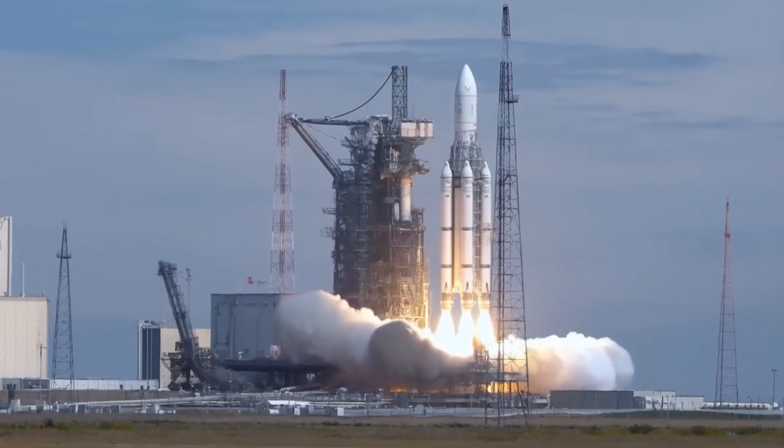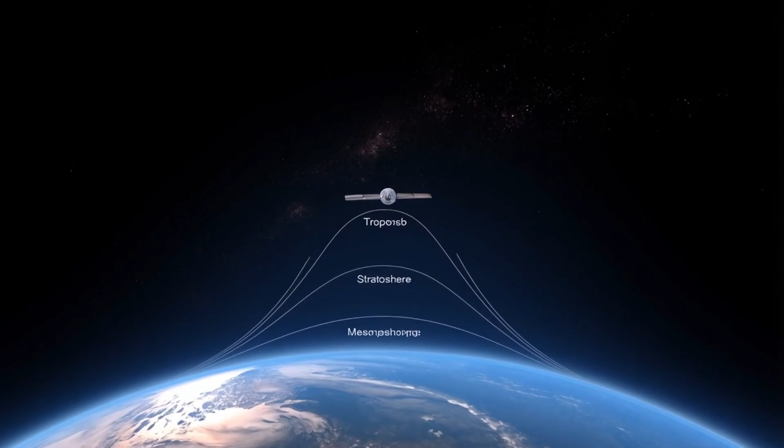But here's where it gets interesting. Notice the definition says, in the atmosphere. Once a vehicle leaves the atmosphere and operates in space, it's technically a spacecraft, not an aircraft, though many spacecraft function as aircraft during launch and landing, like the Space Shuttle did. The Space Shuttle was both an aircraft in the atmosphere and a spacecraft in orbit.

All aircraft fall into two fundamental categories based on how they stay in the air. Category 1. Lighter-than-air aircraft, also called aerostats. These aircraft float because they're literally lighter than the air around them. They use buoyancy, the same principle that makes a beach ball float in water. Hot air balloons work by heating air inside a large envelope. Hot air is less dense than cold air, so the balloon rises. Airships and blimps use gases like helium or hydrogen, which are naturally lighter than air.

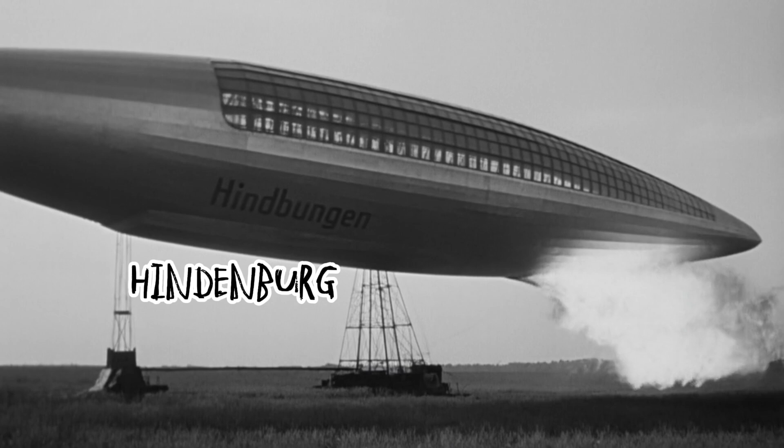And here's something most people don't know. Lighter-than-air craft were actually the first successful aircraft. The Montgolfier brothers flew a hot air balloon in 1783. That's 120 years before the Wright brothers. The famous Hindenburg was a massive lighter-than-air airship. Its tragic 1937 disaster essentially ended the era of passenger airships. Today, lighter-than-air aircraft are mostly used for advertising, aerial observation, and some scientific research.

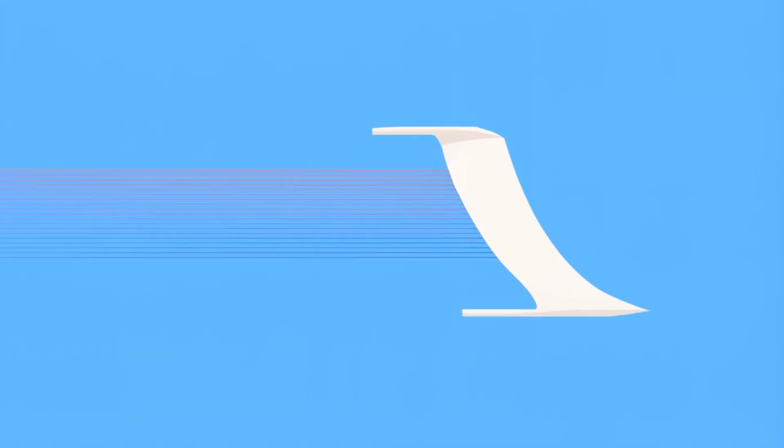Category 2. Heavier-than-air aircraft, also called aerodynes. These aircraft weigh more than the air they displace. A Boeing 747 can weigh over 400 tons. There's no way that's floating. So how do they stay up? They generate lift by moving through the air. That movement creates aerodynamic forces that overcome their weight. Think about birds. They're heavier than air. They stay up by moving their wings through the air, generating lift.

Heavier-than-air aircraft split into two subcategories. Powered aircraft have engines: airplanes, helicopters, jets. Unpowered aircraft, no engines: gliders, hang gliders. But here's the key. Even unpowered aircraft need some movement through the air to generate lift. Gliders use gravity and air currents. They're constantly descending through the air mass around them, even when they appear to be climbing relative to the ground.

Here's the fundamental difference you need to remember. Lighter-than-air aircraft can hover without moving. They're in equilibrium with the air around them. They simply float. Heavier-than-air aircraft must be constantly moving through the air, or in the case of helicopters, constantly moving air around them to stay up. Stop the movement and they fall.

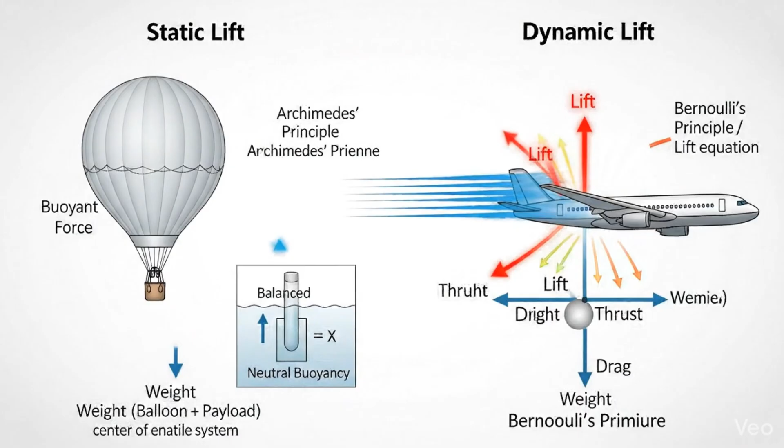Even when an airplane's engines fail, it doesn't drop like a stone. It becomes a glider, still generating lift as it descends. But it must keep moving through the air. This distinction is crucial to understanding everything else about aviation. Lighter-than-air aircraft use static lift from buoyancy. Heavier-than-air aircraft use dynamic lift from movement. Now let's dive deeper into heavier-than-air aircraft, because this is where it gets really interesting.

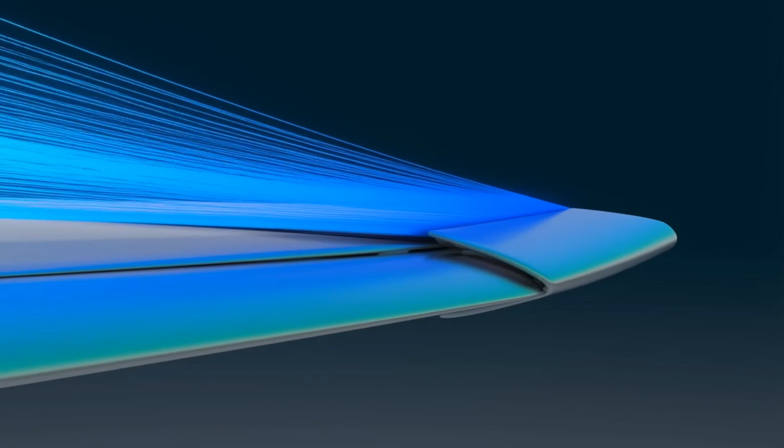The most common type. These aircraft have rigid wings that don't flap or rotate. The wings are shaped, we call it an airfoil, to create lower pressure above and higher pressure below as air flows past. This pressure difference generates lift.

Fixed-wing aircraft include commercial airliners like the Boeing 737 or Airbus A380, private planes like Cessnas, military jets like the F-22 Raptor, cargo aircraft like the C-130 Hercules, and gliders and sailplanes. They're the fastest and most efficient type for long-distance travel. Commercial jets cruise at about 550 miles per hour. Military fighters can exceed 1,500 miles per hour. The trade-off? Most fixed-wing aircraft need runways. They must build up speed to generate enough lift.

These aircraft use rotating wings, we call them rotor blades, to generate lift. The rotor blades are actually just wings that spin. As they rotate, they create the same aerodynamic lift that fixed wings create, but the aircraft doesn't need to move forward to generate it. This is the huge advantage of rotary-wing aircraft. They can hover, take off vertically, land in tiny spaces, and fly in any direction, including backwards.

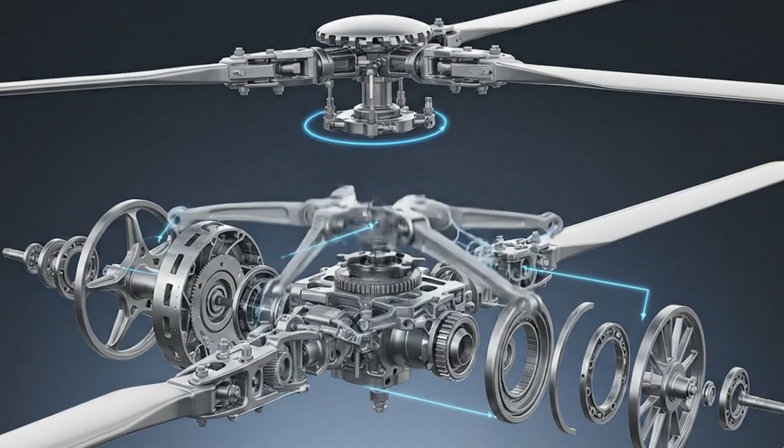Tilt rotors, like the V-22 Osprey, can tilt their rotors to fly like either a helicopter or an airplane. Autogyros, also called gyrocopters, have unpowered rotors that spin from the airflow itself. The trade-off? They're slower and less fuel efficient than fixed-wing aircraft. Maximum speeds are typically 150 to 200 miles per hour. They're also mechanically complex. A helicopter has thousands of moving parts in its rotor system alone, making them expensive to maintain.

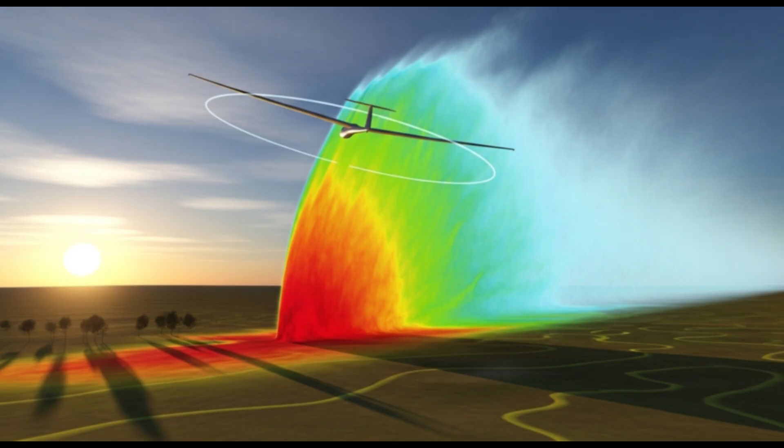These aircraft have no engines at all. They rely entirely on external energy sources. Gliders, also called sailplanes, are towed into the air by powered aircraft or launched from high ground. Once airborne, skilled pilots use rising air currents called thermals to stay aloft. Thermals are columns of warm air rising from sun-heated ground. Glider pilots circle within these thermals to climb, then glide to the next one.

Expert glider pilots can stay airborne for hours and travel hundreds of miles with no engine. Hang gliders and paragliders are simpler, lighter, unpowered aircraft. The pilot hangs beneath a wing and uses body weight to steer.

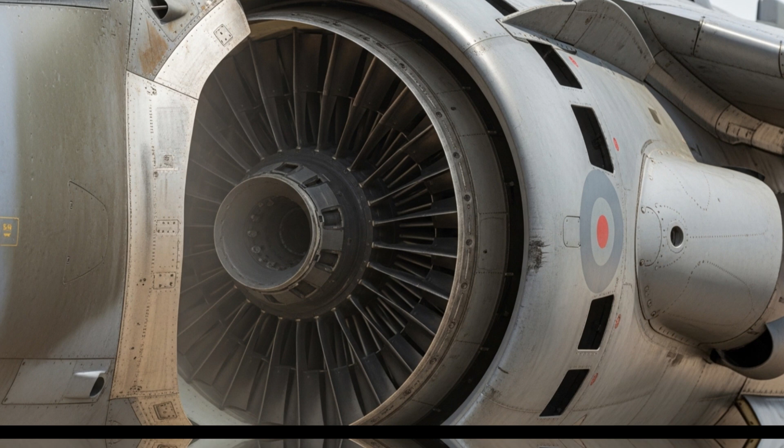This is a special category for aircraft that can take off and land vertically, like helicopters, but fly forward like airplanes. The Harrier uses rotating engine nozzles to direct thrust downward for vertical flight, then rotates them backward for conventional flight. The F-35B uses a similar system with even more advanced technology. And many future flying car and air taxi concepts are powered lift aircraft, combining helicopter-like takeoff with airplane-like cruise efficiency.

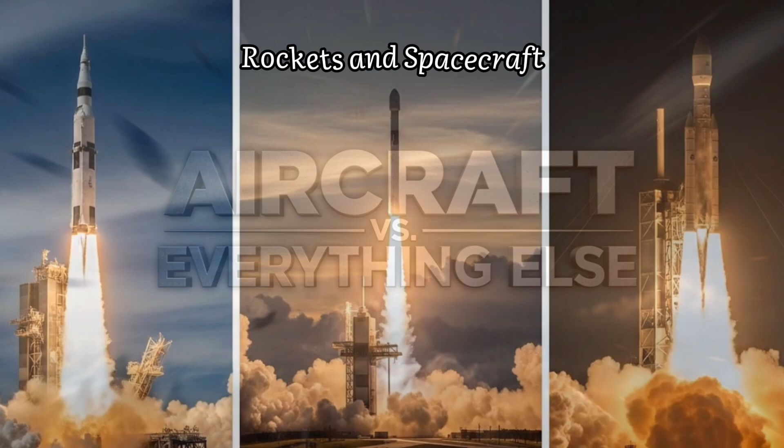Now let's clear up the confusion. What is not an aircraft? Because the boundaries can be tricky. Rockets and spacecraft. Rockets operate primarily outside the atmosphere. They don't use air for support. They use thrust to overcome gravity directly. In space, there's no air. Rockets work by Newton's third law, expelling mass in one direction to accelerate in the other.

Missiles. Guided missiles are technically aircraft by definition. They derive support from air reactions, but they're classified separately as munitions. Some missiles, like cruise missiles, are essentially small unmanned aircraft. Others, like ballistic missiles, are more like rockets.

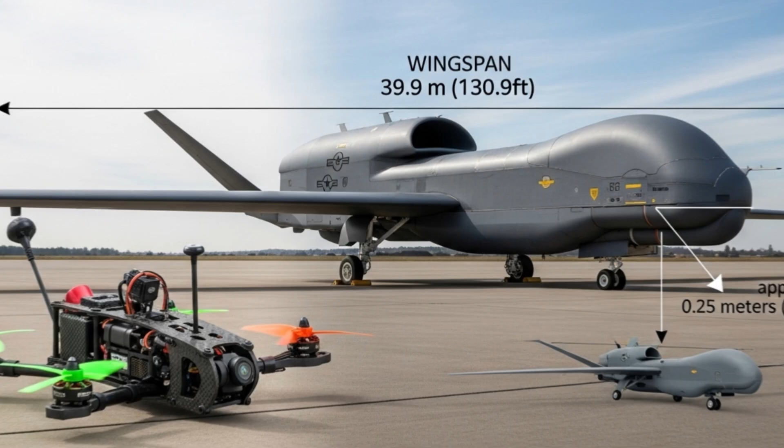Drones and UAVs. Are drones aircraft? Yes, absolutely. The fact that they're unmanned doesn't change anything. They still derive support from air reactions. The official term is UAV, Unmanned Aerial Vehicle, or UAS, Unmanned Aircraft System. Notice, aircraft is right there in the name. Drones range from tiny toys weighing ounces to military drones with wingspans over 130 feet, larger than a Boeing 737.

Hovercraft. Remember our definition? Aircraft derive support from air reactions other than against the Earth's surface. Hovercraft create a cushion of air trapped between the vehicle and the ground. They're pushing air against the surface, so not aircraft. Ground effect vehicles like the Soviet Ekranoplan are borderline. They fly extremely close to the surface using enhanced lift from ground effect. The international aviation community is still debating whether they qualify as aircraft.

Wearable flight devices. Jetpacks use thrust like rockets. Most aren't classified as aircraft. Wingsuits generate lift aerodynamically, but they're classified as sport equipment, though technically they meet the definition of an unpowered aircraft. Classification matters because it determines what regulations apply.

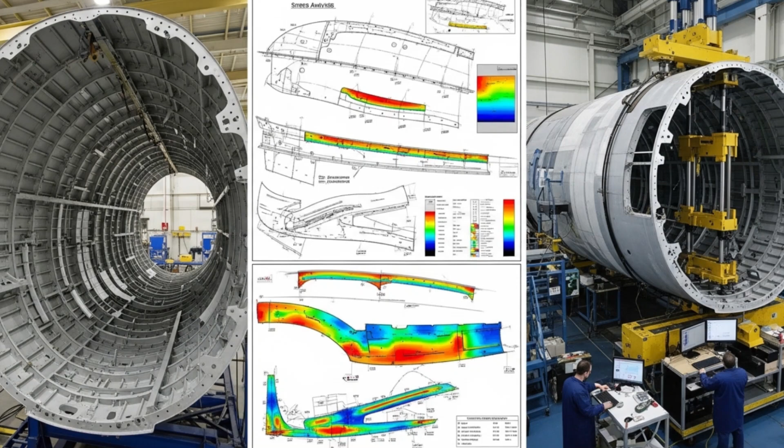Despite the huge variety we've just discussed, all aircraft share certain fundamental components or characteristics. 1. A structure to support loads. Every aircraft needs a structure, whether it's the fuselage of an airplane, the basket of a balloon, or the frame of a hang glider. This structure must withstand its own weight, payload, that's passengers, cargo, fuel, aerodynamic forces during flight, landing impacts, and environmental stresses.

Materials vary wildly. Commercial jets use aluminum alloys and carbon composites. Ultralight aircraft use fabric over aluminum frames. Hot air balloons use ripstop nylon. 2. A system to generate or use lift. This is what keeps the aircraft in the air. For fixed-wing aircraft, wings shaped to create aerodynamic lift. For rotary-wing, rotating blades. For lighter-than-air aircraft, buoyancy from heated air or light gases. Even a parachute generates lift aerodynamically. It's technically an unpowered aircraft.

3. A control system. Aircraft need a way to control their movement, though the sophistication varies dramatically. Modern commercial jets have hydraulic flight controls, fly-by-wire computers, and autopilots. A hang glider pilot controls the aircraft simply by shifting their body weight. Hot air balloons are controlled by heating the air to climb and venting hot air to descend.

But every aircraft has some method of control, even if it's limited. 4. For powered aircraft, a propulsion system. Powered aircraft need engines to generate thrust. Small aircraft use piston engines turning propellers. Commercial jets use turbofan engines. Helicopters use gas turbines connected through complex transmissions to their rotors. And the newest generation uses electric motors, still developing but rapidly improving.

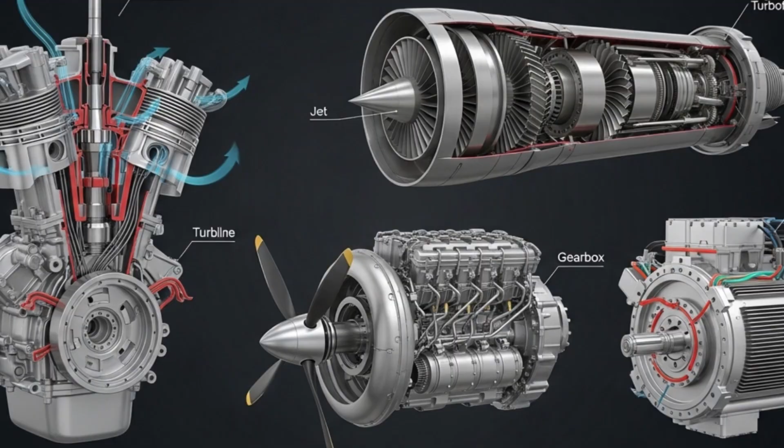5. A method of takeoff and landing. Every aircraft needs some way to transition between ground and air. Most airplanes use landing gear and require runways. Helicopters can land almost anywhere flat. Balloons simply descend. Seaplanes land on water. Military carrier aircraft use catapults for launch and arresting cables for landing.

Understanding what aircraft are also means understanding how they're officially classified, because this affects regulations and licensing. In the United States, the FAA classifies aircraft. In Europe, it's EASA. Internationally, ICAO sets the standards.

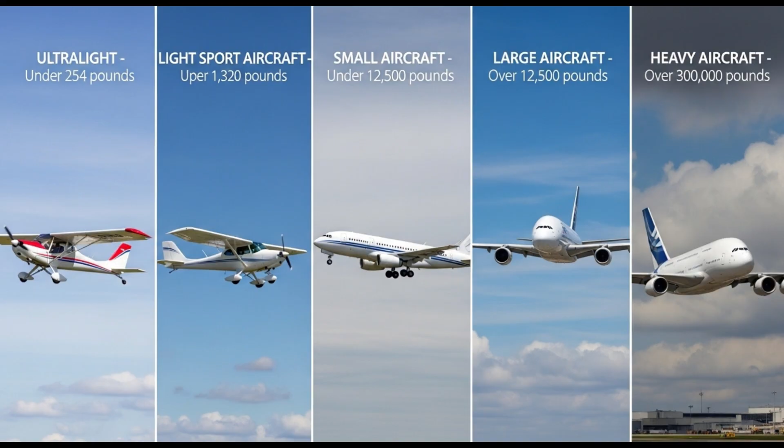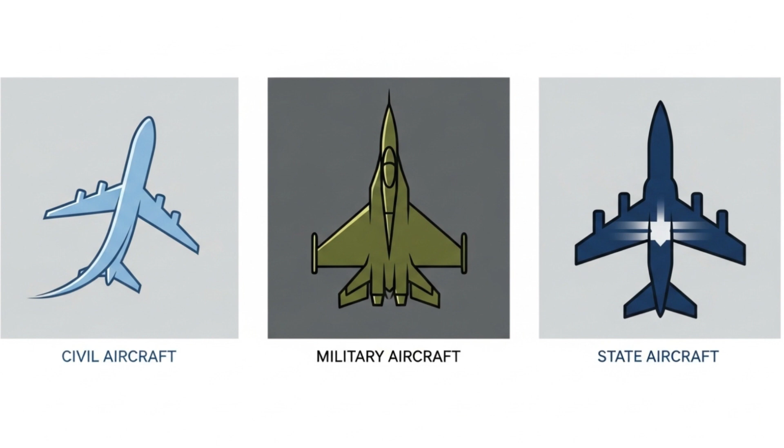Aircraft are classified by weight: ultralight, under 254 pounds with minimal regulation; light sport aircraft, up to 1,320 pounds; small aircraft, under 12,500 pounds; large aircraft over 12,500 pounds, and heavy aircraft over 300,000 pounds, like the Airbus A380. By purpose: civil aircraft for non-military use, military aircraft for defense, state aircraft for government operations. By operation: commercial, paying passengers or cargo; private, personal use; charter, hired for specific flights; cargo, freight only.

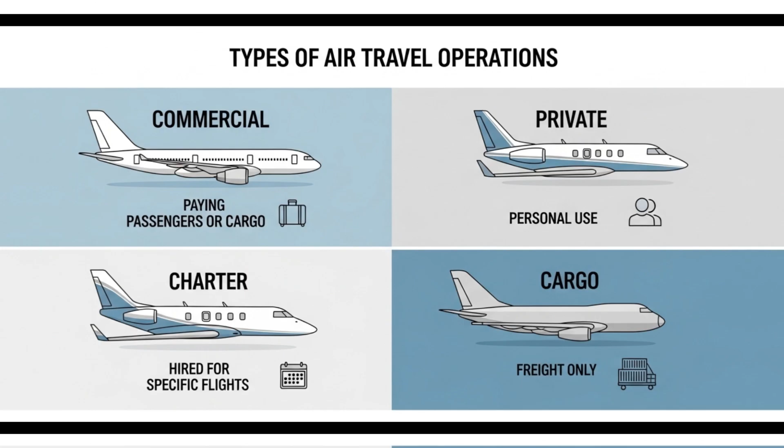Why does this matter? Different categories have different licensing requirements, maintenance standards, operating restrictions, airspace access rules, and safety equipment requirements. A pilot licensed for a small single-engine aircraft can't just jump into a commercial airliner. Each category requires specific training and certification.

What we consider an aircraft has evolved as technology advanced. Early 1900s, only lighter-than-air aircraft existed. Aircraft meant balloons and dirigibles. 1903 to the 1920s, heavier-than-air powered flight emerged. The definition expanded to include airplanes. The 1940s, helicopters became practical. Rotary-wing aircraft joined the definition. The jet age, aircraft now included vehicles approaching and exceeding the speed of sound.

The 2000s to present, drones exploded in variety and capability. Unmanned aircraft created entirely new regulatory challenges. And looking ahead, electric vertical takeoff vehicles and flying cars are blurring categories further. As space tourism develops with vehicles like SpaceShipTwo, the line between aircraft and spacecraft continues to blur. Aviation authorities constantly update definitions to address emerging technologies.

You might be thinking, why does it matter how we define aircraft? Isn't this just semantics? Actually, it matters a lot. Legal framework. If something is classified as an aircraft, specific laws apply. Accidents must be investigated by aviation authorities. Liability rules are different from other vehicles. Licensing. Operating an aircraft requires certification. The type of aircraft determines what licenses and ratings you need.

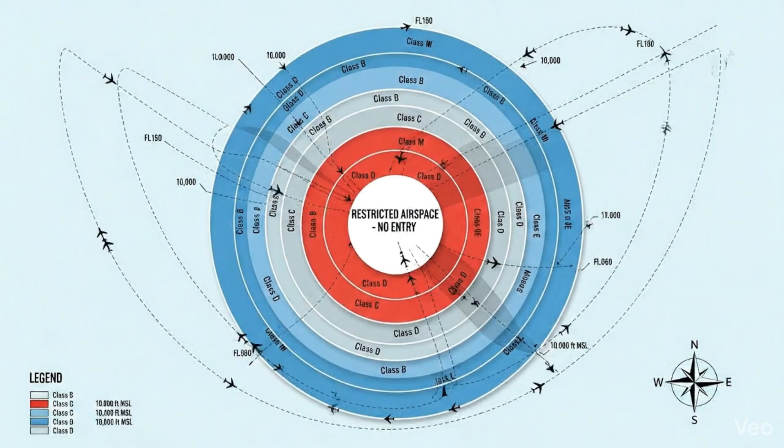Airspace access. Different aircraft have different airspace privileges. Commercial jets can fly in controlled airspace that ultralight aircraft cannot enter. Insurance and liability. Aircraft insurance is specialized and expensive. Classification directly affects coverage and costs. Innovation. Clear definitions help engineers understand what regulations their new designs will face, which actually shapes how future aircraft are developed.

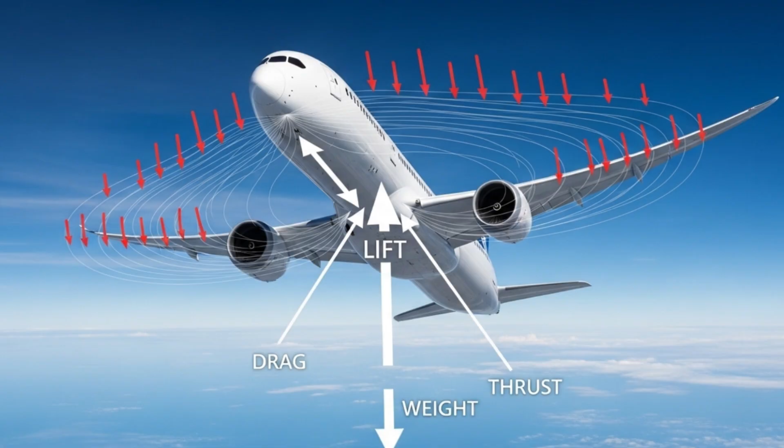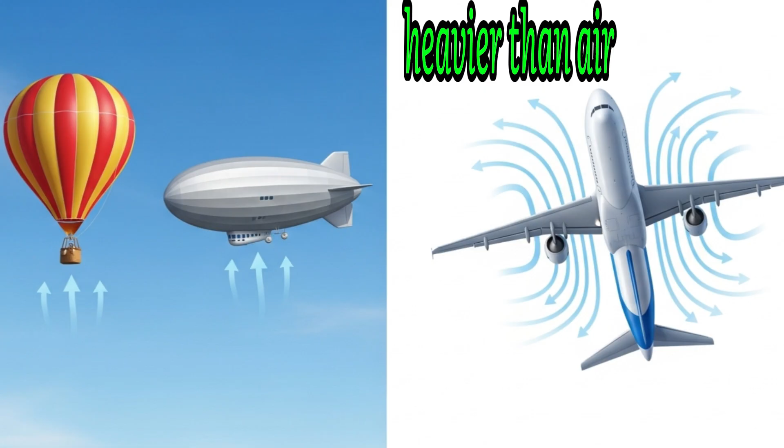Let's recap the key concepts from today. 1. The official definition. An aircraft derives support in the atmosphere from reactions of the air, excluding reactions against the Earth's surface. 2. Two fundamental categories: lighter than air, aerostats, float using buoyancy; heavier than air, aerodynes, generate lift through movement. 3. Main types: fixed wing, the fastest and most efficient; rotary wing, can hover; unpowered, use air currents; powered lift, vertical takeoff with horizontal flight.

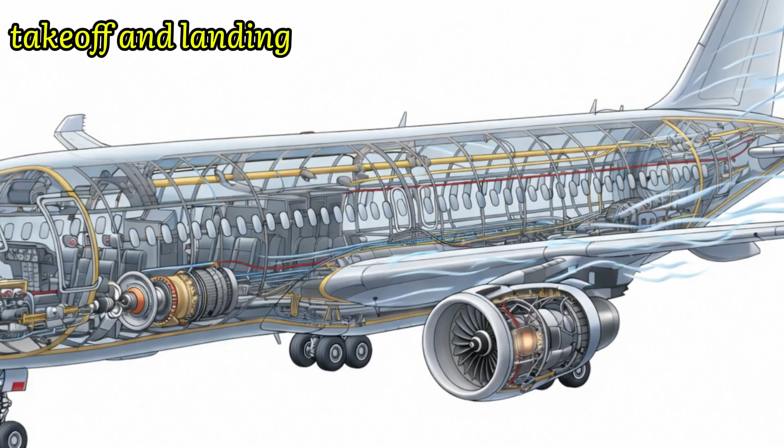4. Essential components. All aircraft need a structure, a lift generation system, a control system, a propulsion system if powered, and a takeoff and landing method. 5. Classifications matter. Official classifications determine regulations, licensing, operations, and safety standards. From a massive Airbus A380 carrying 500 passengers to a tiny drone weighing a few ounces, they're all aircraft because they all derive their support from the air itself.

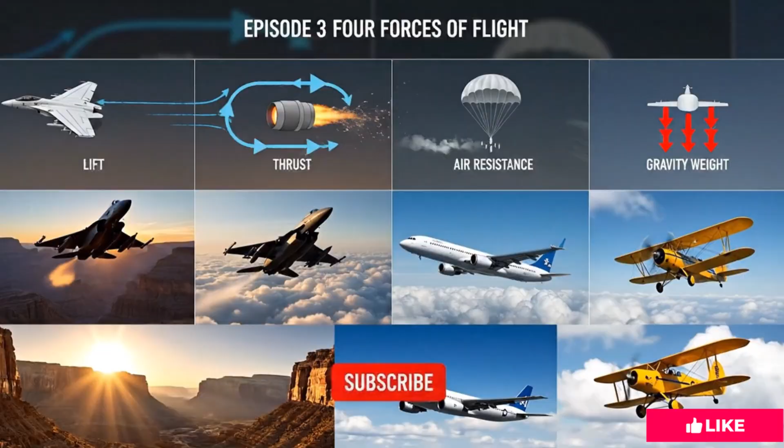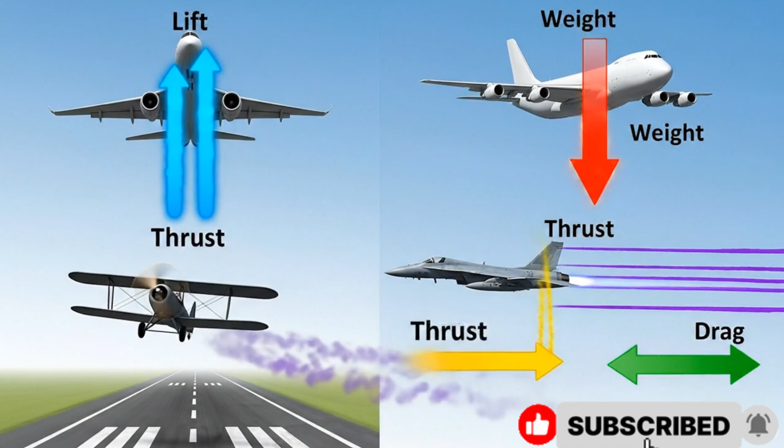Now that we understand what aircraft are, we need to understand how they stay in the air. In the next episode, we're diving into the 4 forces of flight: lift, weight, thrust, and drag. These 4 forces govern every single moment of every flight. Understanding them is absolutely fundamental to understanding aviation. We'll explore how wings actually generate lift, and it's not quite what you might think. Why weight isn't just about how heavy the aircraft is, how thrust overcomes drag, and the delicate balance that keeps aircraft flying.

The next time you see something flying overhead, you'll see it differently now. You'll ask yourself, is that lighter than air or heavier than air? Fixed wing or rotary wing? Powered or unpowered? And yes, that delivery drone buzzing past is just as much an aircraft as the 777 crossing the Atlantic. They both derive their support from the atmosphere.